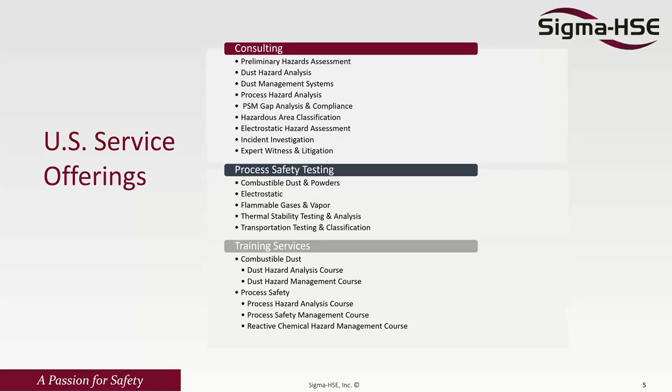I have over 24 years of experience in safety engineering, and process safety more precisely. That includes anything like DHAs, hazardous area classifications that we're going to be covering today. In addition to that, I have experience in facility siting, incident investigation, auditing, PHAs, etc.

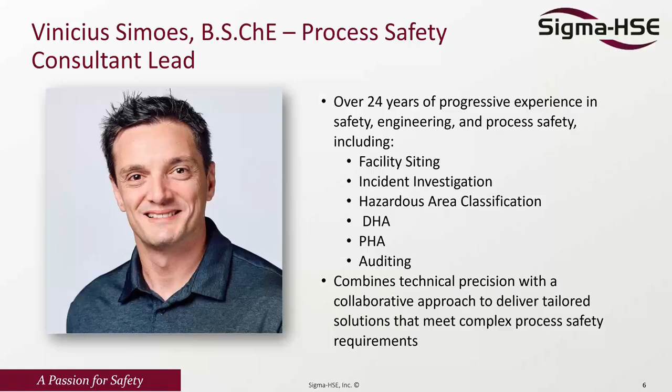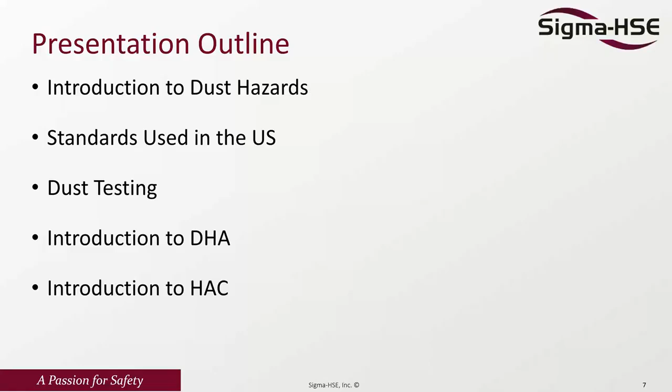The idea of today's webinar, as Mark highlighted, is an introduction to dust hazards: understanding what they are, why we need to address them, why we look after them, and try to mitigate what could be a potential issue, the standards that are normally used in the US. Then we're going to talk a lot about dust testing, DHA, and hazardous area classification, and highlight the importance of each one and why we're focusing on them. The industry has been trending to focus a lot more on this for the last several years.

A lot of this has to do with the incident data. If we look back from the mid-2010s to now, there's a significant decrease in the quantity and amount of fires and explosions, and resulting injuries and possibly fatalities over the course of the years. In the graph, you have the United States, Canada, and international data. A lot of this data isn't going to be precise, because many countries that didn't record this in the past have since started recording it, so the international data is a bit of a bigger mix.

The trend I want to highlight is basically the United States and Canada, because those have been recorded for a while now. This data gives us an average of 28 dust explosions per year, which leads to around 25 injuries and a range of 1 to 6 fatalities over the last several years, and that's consistent going back even 8-10 years.

We exclude dust fires from this, because a lot of times you just have the fire and that's it. So we focus more in terms of fires and explosions, flash fires and the explosion side of things, because those are usually the ones that have significant impact.

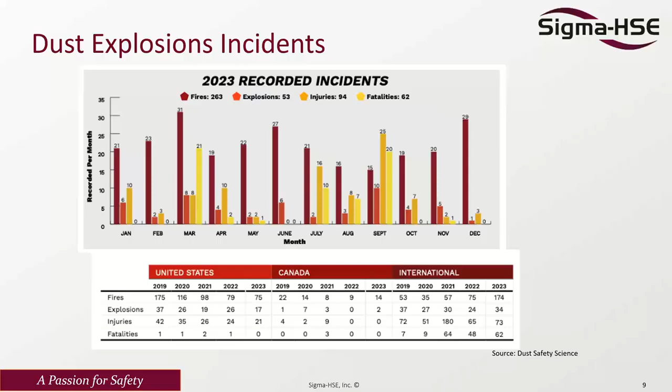Once we talk about fires, flash fires and explosions, there's a topic I want to touch on, which is what Mark was talking about, the pentagon, because it all starts with the triangle. If you think about it, I have an oxidant, I have an ignition source, and I have the fuel. With those three, that's what I need to generate a fire.

With that fire, great. It's localized. It's just looking into that specific area there.

Once we start tossing the conversation about dust clouds or vapor clouds, or anything like that, we're talking about a dispersion. So that cloud is not steady anymore, it moves and creates a little bit of an envelope. If we have ignition at that point, we have the oxidant, we have the fuel, we have the ignition source, and we have this dispersion, we're now talking about a fire, a flash fire, which is basically a cloud fire. So anyone in that area will be severely hurt, severely injured, and possibly a fatality. That's where the importance of good housekeeping comes in, which we'll talk about further down, because it minimizes those possibilities of dust clouds.

Once we toss an extra factor in there, which is confinement and congestion, then we're talking about a possible explosion. What generates an explosion is the cloud catches fire, and that cloud accelerates enough to generate an overpressure. The way this happens is by having congestion and confinement. Think about a simple example: if you put a little firecracker inside a box, the bang is much bigger. Why? Because it's congested, right? So that's the same idea. The more confinement you have, the more the flame accelerates, the more speed it generates, and the more you reach towards the maximum pressure that can be generated.

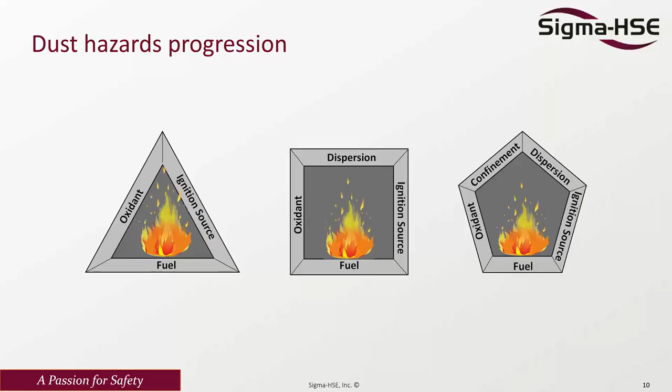The way we need to look at preventing those fires and explosions is basically by taking away one of the edges of the pentagon, the square, the box, or the triangle, however you think about it. For explosions, the simplest way is by taking away the confinement. If we take the confinement away, the explosion is gone, because I don't have enough to accelerate that flame and actually get it ignited.

The next one is to get rid of the flash fire. How do we do that? By taking the dispersion out of it. If I take the dispersion out, there is no flash fire. And how can I do that? As I mentioned, good housekeeping. Be sure your system does not let dust out. Be sure that whatever dust is there, I take care of it. I do good housekeeping so there's no dust settling that can generate a cloud.

And then last but not least, if I need to get rid of the fire, I need to get rid of either the fuel, the oxidant, or the ignition source. Let's be honest, getting rid of the fuel is almost impossible. The only way is if we replace the material we're working on, and there are some processes where we can't — it's just a single material we need and we're going to need it. For example, if we're making bread, we need the wheat. Needing the wheat, there's no way I can take the wheat out and do something different. So that's just one example.

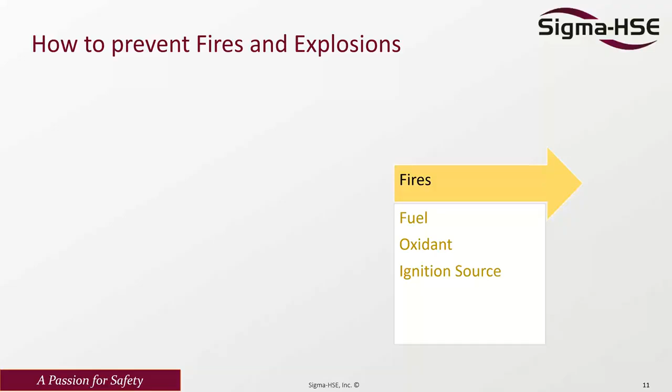So that's when we're talking about ignition sources, taking ignition sources out of the equation. Be sure we know what the conversation is going to be later on, which is the testing. Be sure what's the minimum ignition energy I need for that material, because with that I know my ignition source present cannot exceed that energy. So this is kind of what we're going to talk about in a little bit.

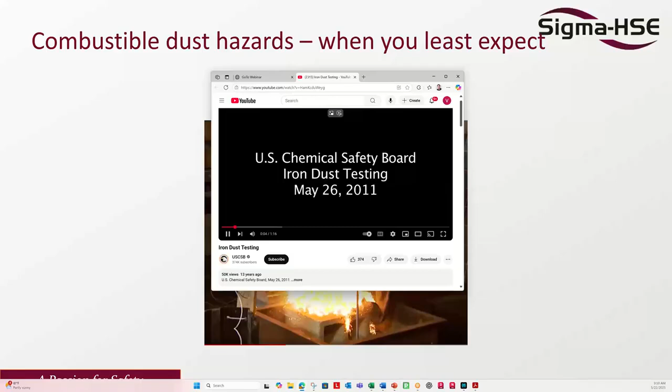One of the things, and why the test is expected, is that a lot of times we get ignition of things that we least expect. So the CSB has this video about iron — it's just an iron dust testing video. They release a little bit of iron dust and they have an ignition source, and you get to see what happens. The idea is to see it exactly, in real speed and in slow motion as well, both of them, and you're going to see how they catch.

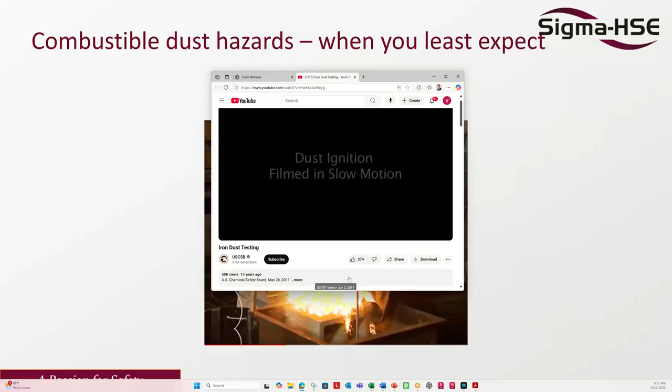And you can see in slow motion the little bit of particles that get ignited.

This is one of the things we're talking about as being extremely important for our testing, because we want to be sure that we understand what's the hazard associated with that chemical, dust, or particulate.

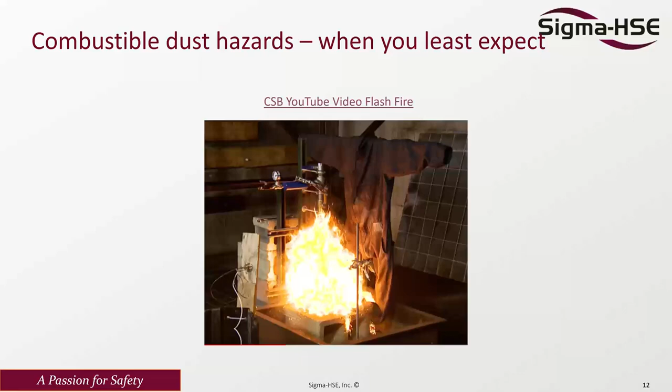So all great, we saw the fire, we saw this, and we can talk about explosions and so on. But there's one thing I want to highlight that we really need to take into account when we're talking about secondary dust explosions originated from a fire or a primary explosion.

This primary explosion basically disturbs the dust that is there. So if you have a dust layer in equipment and an explosion on nearby equipment, or even a venting panel releases, just that release can disturb the dust and create a secondary cloud. The secondary explosion is when we get ignition on this disturbed dust, and that tends to have a much more severe impact. That's the importance of understanding that.

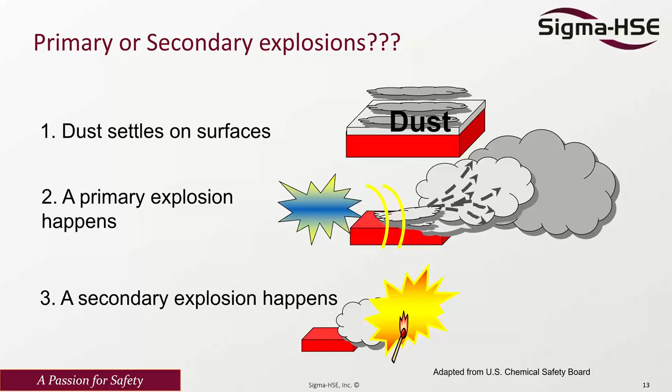So now I want to talk about what standards we use in the U.S., specifically in the industry to deal with combustible dust.

NFPA asks for 4 items, or assigns 4 responsibilities, for operators and owners. They talk about determining the combustibility and explosibility hazard of the material—that's where testing comes in. We identify and assess fire, flash fires, and explosion hazards—that's when dust hazard analysis comes into place, and it's now a requirement for OSHA that we carry those.

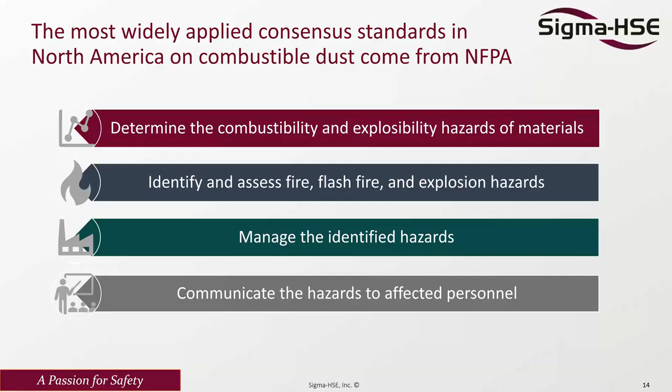Then we need to manage the identified hazards, understand what they are, and communicate them to the affected personnel. These are all responsibilities of operators and owners: identify whether the dust is combustible, manage the identified hazards, and communicate to personnel who can be affected. The commonly applied U.S. standards all come from NFPA.

There's NFPA 61 for agriculture and food, 484 for metals, 664 for wood, and some others. Some apply across the board, like NFPA 68 for explosion protection vent design, 499 for electrical area classification, which we'll talk about later, and 652 and 654. Those are common for everyone.

On top of that, NFPA came up with 660, which covers all materials. It's a replacement standard, and the intention is to eventually migrate all those individual standards into a single one. This will make your life a lot easier to determine what you need and which standards to follow, rather than trying to figure it out.

This is just a sample of some of the standards—there's a lot more from NFPA, and other standards from other industries, like the UK has its own standard for these. All of this depends on the country you're in, where you're doing the assessment, or even the client itself.

I myself did several of these over the Americas, basically because of client requirements, even though it's not required by our standards here or in South America. When I went to do this, it was still required because of the client. So it's not only regulation, but could be client compliance too.

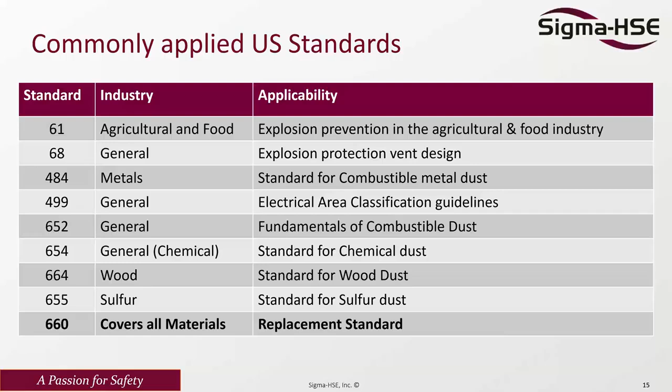So the first of the 4 items the operator needs to deal with is the combustible dust test. The reason why we do this is that we need to look into things.

There's a screening test based on UN recommendations for transport of dangerous goods, basically to know if the material is explosible or not. This is a go/no-go kind of test. ASTM has 2 standards for the screening, and our lab in the UK and India knows all those standards, applies them, and we do several testings for different clients.

So for combustible dust testing, we can take historical data, published data, or we can do the testing ourselves.

The major advantage of doing the testing is that you're specific to your material, rather than taking a generic rule or generic data. I'll give you an example of petroleum coke. Petroleum coke can have compositions that are not even combustible, to compositions that are combustible. Our lab tests a diverse range, some ignite, some don't, and it has a lot to do with the composition. This is the importance of why you test your own product, so you can ensure whether you are explosive or not in your situation.

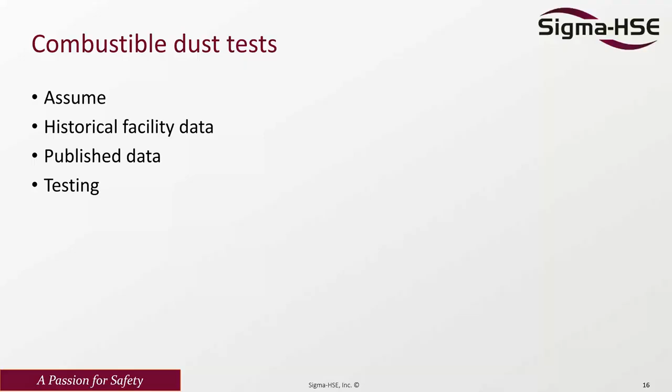There are several tests that we can conduct. The most important ones figure out the severity: the minimum explosive concentration, basically how much do I need to actually ignite a cloud. And explosion severity tells me the Pmax, the maximum pressure, and KST.

Then we have sensitivity to ignition, which tells me the minimum ignition energy - how much do I really need to ignite that. Then there's the minimum autoignition temperature for the cloud and for the layer. So think about this: if a layer of dust is settling in equipment, and that equipment is heated above that temperature, it's the autoignition temperature, meaning the material ignites.

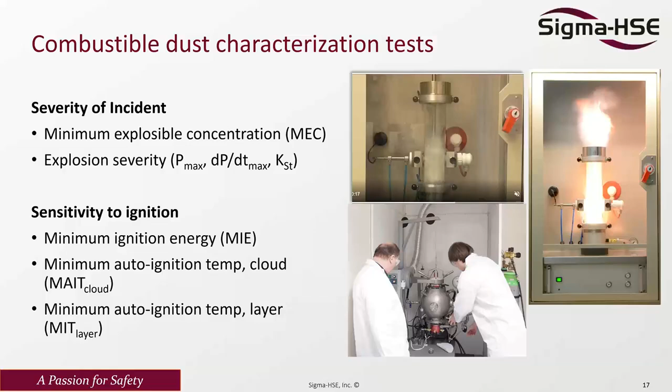The cloud is the same thing. If the cloud reaches an area like a furnace, even without direct flame, it could still ignite. The minimum ignition energy tells me, for example, for sparks, what that threshold is. So if the material is under the minimum ignition energy for something like brushing, it's okay for me to use that as part of my housekeeping. If it's not, then I need to take it away and use vacuum systems and so on. That's where we understand what our material is and what we can do in terms of determining the severity and the impact.

Next, I want to talk about the second item, which is identifying hazards. That's where the DHA, the dust hazard analysis, comes into place. Similar to what we talked about not too long ago in our webinar on PHAs, or process hazard analysis, the DHA uses a similar approach. You have several ways to do it, and we're going to talk about two of them here. One is risk-based, where you define your scenarios and risk rank them, and the other is a checklist. Those are the most common ways of doing DHAs.

One requirement by NFPA is that it's led by a qualified person, someone with experience, because the better the quality of your workshop, the better the quality of the assessment, the better your results, and the more aware you become. That's the reason for requiring a qualified person.

It's based on the combustible dust characteristics of the material we're discussing. We evaluate the hazards and scenarios and provide recommendations on what can be improved in your system, because often we define our scenarios, define all our safeguards, look into mitigations, and the risk is still not acceptable. In that case, we need to provide recommendations to reach an acceptable level - it could be as simple as increasing ventilation in an area.

So if dust is present, it's not going to be enough in terms of volume to generate a concern for me. These are the kinds of things we talk about. Of course, all of this is documented into either a spreadsheet or a report that can be reassessed.

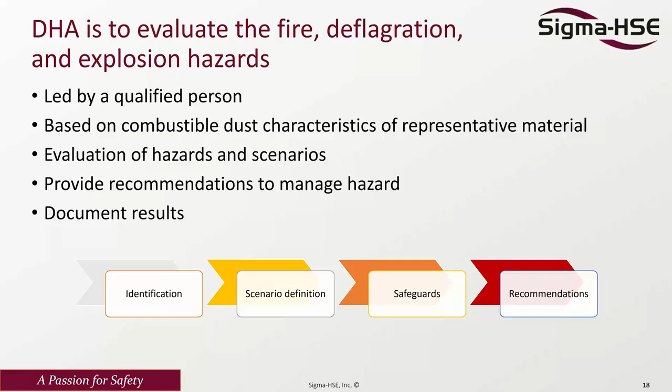What needs to be evaluated, in terms of equipment, is every piece of equipment in the process that handles combustible dust - we need to look at fire and deflagration, basically explosions, and each building space that contains combustible dust. We need to look into storage, the final product, and the process. All of this is covered as part of the DHA - we need to go and assess every single one of them.

And for the buildings, we're going to look into dust migration, deflagration propagation, the fire hazard, the deflagration hazard, and of course look into housekeeping against accumulation. So all of this is part of a DHA.

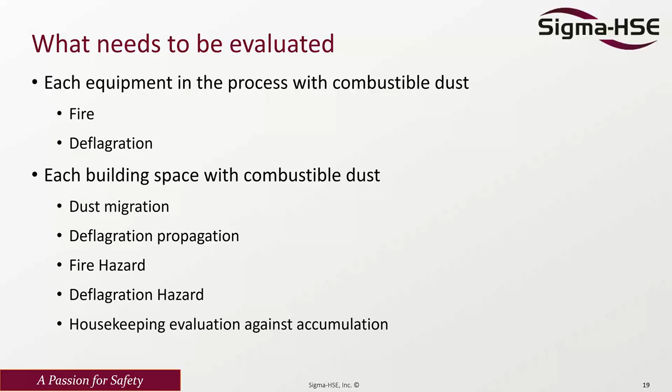That's where the challenge becomes a lot of times to do a DHA or a desktop DHA, is because you can get the housekeeping process, you can get your procedure for housekeeping, but not necessarily does it mean that this is going to be implemented when it comes in. So that's where it becomes a little bit more of a challenge to do those over the desk assessments.

So one of the things that we look at, as I mentioned, is we need to assess the hazards in buildings as part of DHAs. Very simple: the material, that equipment has combustible dust, we need to look into that. We need to look into evaluation, what scenarios can come from that. But when it comes to buildings, is where we need to look.

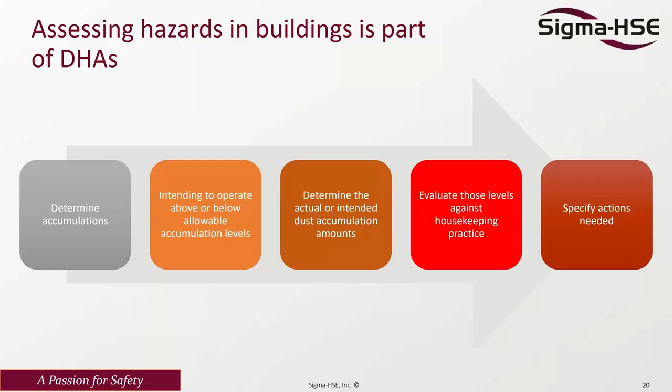Let's determine accumulations. Do we have the intent to operate this above or below the accumulation levels that are accepted? We need to determine the actual or intended dust accumulation amounts, and then we evaluate those against housekeeping practice, and then we can specify actions if needed. This is the initial part of DHA, determining every single thing, just postulating the scenarios, what can happen.

Now we look into ignition sources. What ignition sources do I need to consider? Do I need to consider hot work? Do I have permits for doing hot work? Trucks, hot surfaces, open flames like an oven, fuel fired equipment, heated equipment.

Because if you think about it, we even talk about some of those as part of the testing. If it goes above a certain temperature, and that's the auto ignition temperature for the cloud, I don't really need a flame per se. Above their auto ignition, that material can catch fire.

Then we're talking about electrical, impact sparks, frictional sparks, electrostatic discharge. There's different things that we need to consider.

One of the assessments that we do at Sigma as well is electrostatic hazard assessments, where we come in and we measure your electrostatic properties. We have cases where you think your shoes are spark proof, and then when we test it, we figure out that no, you can actually conduct enough that will actually create an ignition source.

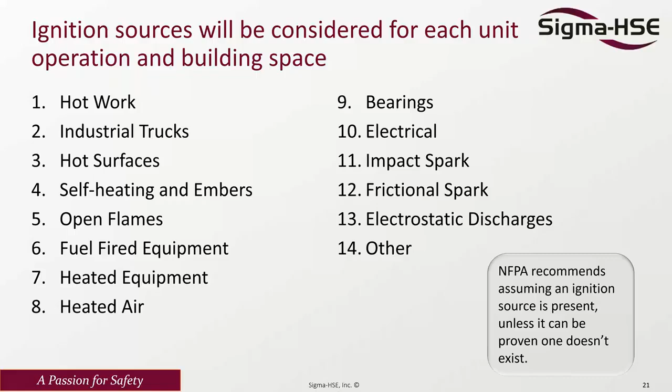So all of this is ways that the industry has been evolving to actually prevent dangerous things from occurring. NFPA itself has an energy scale for regular activities: corona, brush discharge, bulking discharge, and then sparks, and then you look into that against the minimum ignition energy for the material.

So we're talking about this, we're talking about ignition, we're talking about postulating the accidents. Now we get to the part of doing the assessment. How are we going to do this assessment? The way I'll cover is two ways, basically.

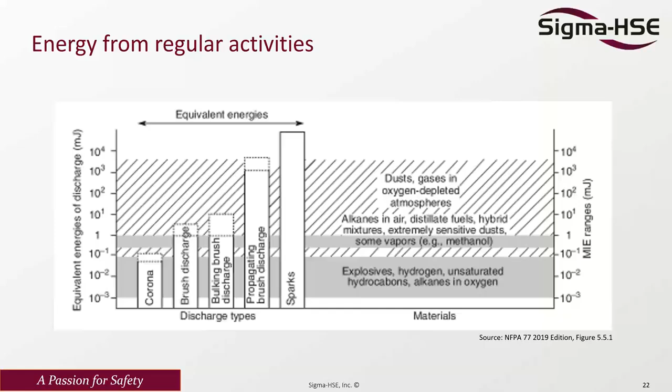The first one is basically a risk-based approach, where we're going to employ a risk ranking matrix to prioritize the implementation. It can be a matrix that's 4x4, 5x5 - I saw a matrix 8x8. The more layers you have on this matrix, the more complicated it becomes to define, okay, is that an A or is that a B? Is that a D or is that an E? So the most notorious accepted reasonable size matrix is a 5x5.

So it becomes a little bit easier for me to say, yeah, no, this is not going to happen. I have seen matrices that say it happens once in the industry, once in the life of our company, once in the life of the facility - all of this gives you the ability to do it. So in a nutshell, what we try to do here is rank risk. Let's say if I have a release from this conveyor belt, what is the likelihood that it will occur?

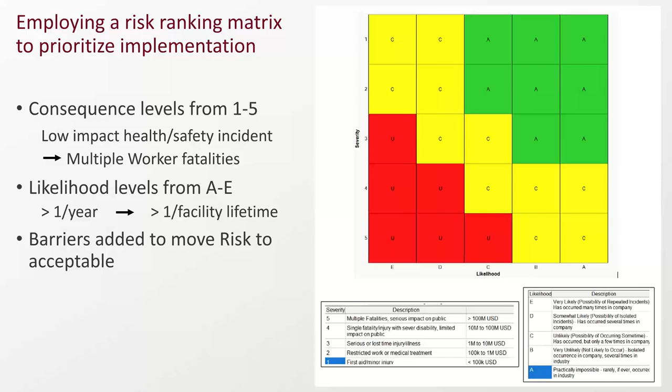The other option that I mentioned is checklists, which allow for easy evaluation of ignition sources. It's simple to prepare using well-defined codes and standards. We have one that used to use the old standards, and we already have one that is using 660, for example. So if you want to do the assessment on 660, we can use that checklist. Or if you want to do the old standard 652, 654, it's all in there too.

And then we look at the answer, the cause, the consequence, we risk it, we risk rank it, and then we provide recommendations. So that's basically how it goes. So we're going to provide you with valid information in terms of what can be done to prevent that, right?

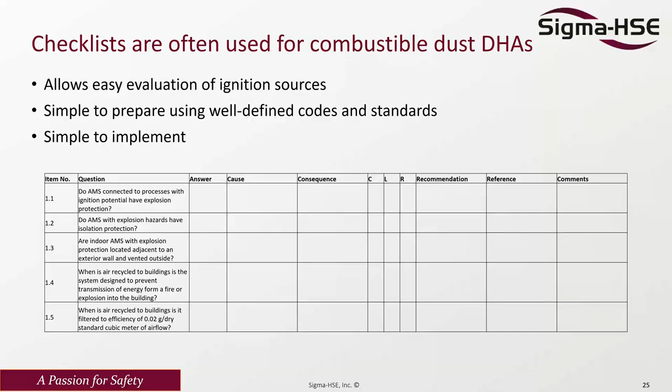So this is the two that we have. The problem that we have a lot of times is that NFPA is going to rely on us to determine where the explosion hazard deflagration exists. So that's where it goes back to needing someone with experience to do it. And it's not only the lead person, but also the team that is going to be doing it. So we can determine every single possible scenario that can occur, and we look into them.

In terms of deflagration, we look at the particle size to deflagrate. Is that suspended in the air? Is it sufficiently high concentration to deflagrate? Do we have enough ignition, is the ignition source strong enough to ignite that? And then the explosion is all of the above, in a compartment or container or along a whole bunch of pieces of equipment, right?

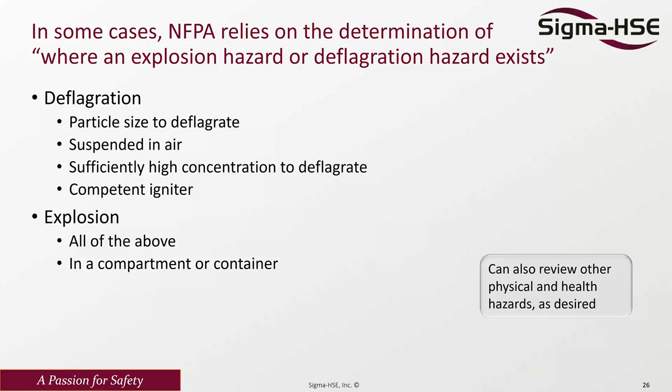So as I mentioned, this is one of the things that we do. And again, we look into physical and health hazards for all of those. And then one of the things is, we're talking about the importance of housekeeping because we avoid the dust accumulation. We design for dust containment, right?

But let's be honest, dust comes out. Dust collection can be included, but every now and then we're still going to have material outside. So the predictive maintenance prevents those leaks, but we need to take care of the housekeeping where needed to avoid a secondary explosion.

So the secondary explosion, as we talked before, is when we start the initial blast wave. It doesn't even need to be a blast. As I mentioned, it could be just a venting panel releasing pressure because there was an increase of pressure inside the system, and before an explosion occurs, it does use that vent panel. And from that vent panel, we can disturb the dust that is accumulated, and that can be ignited, and a secondary explosion can happen, which is worse in that case.

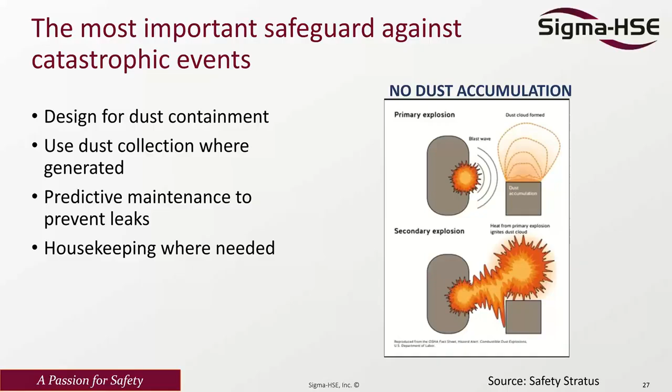So a successful prevention, a successful DHA, doesn't stop right at that first step. We're talking about determining the combustibility and explosibility hazards of the materials. This is required by NFPA, that you need to evaluate and test your dust. We are going to identify and assess the fire, flash fires, and explosion hazards. We're going to manage those hazards, and we're going to communicate those hazards to affected personnel.

This is a cycle that needs to come back, because that person that can be affected is also a catalyst to come back and say, hey, I know we're not supposed to have this, but it's coming around, it's having accumulation of dust over there. So it's a continuous process to try to implement this.

A DHA, to be successful, should include a management of change process in the end, so that any major changes trigger a redo of the DHA. Or every 5 years, you're supposed to redo your DHA. It's similar to what we talked about with PHAs, and management of change can help you with that.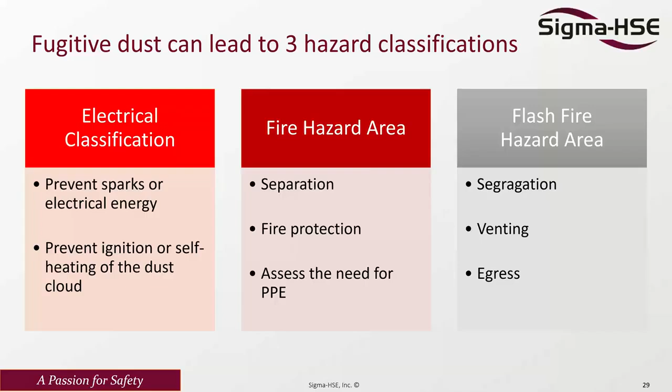So when we talk about area classification or hazard classification, one of the things that comes into light as well is area classification. Dust accumulation impacts the area's electrical classification. So I need to be mindful that once there's a possibility of dust getting out, or having dust present, I need to determine what kind of protection systems I need.

Do I need ATEX equipment? Do I need explosion-proof equipment? What is needed from me to actually keep that operation and the process safe?

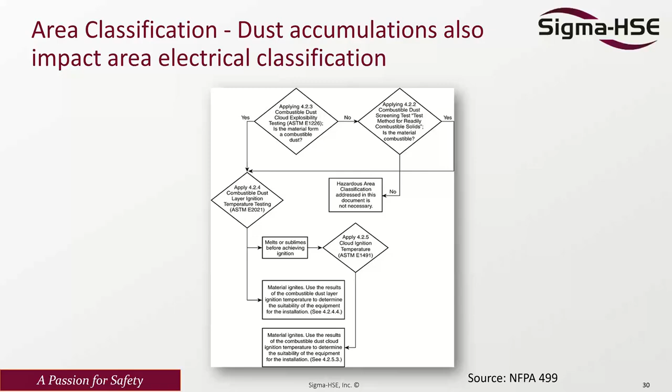NFPA 499 says that you should test your dust for a go, no-go explosion determination. If it is a go for explosion, then you need to do the area classification. If it's a no-go, we can skip that, because here are the results from my material, here's the final report. If it is a go, then we need to apply that.

NFPA has 3 different area classifications or classes. Class 1 is flammable gas or vapors. Class 2 is combustible dust, and class 3 is combustible fibers or flyings.

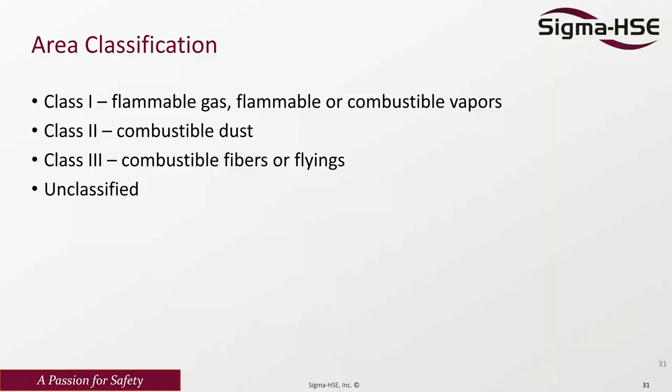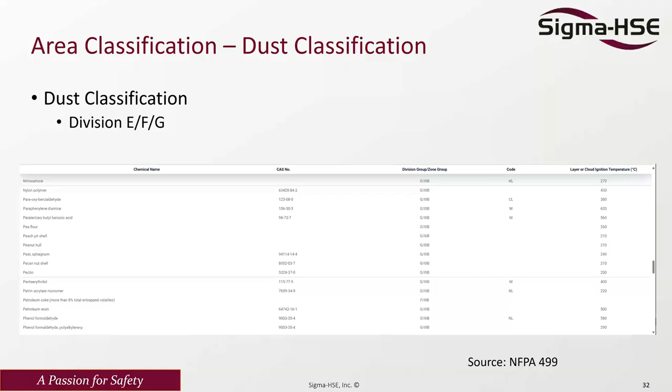Why do we use this? The first reason is the layer or cloud ignition temperature, so we know what kind of ignition temperature we're going to need. For the area classification, the dust type tells me which diagram to use to do the electrical classification.

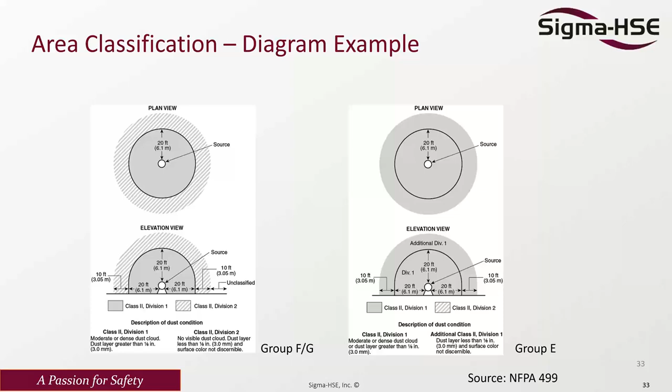Things that allow us, that's where it becomes valid after implementation - even if you do an electrical area classification as part of the design, after it's implemented and there's a little bit of operation, it's good to come back and assess it. You may have said we don't have accumulation in this area, but after inspecting the plant, there's actually dust a little bit over 1/8 of an inch, or a bit bigger than 3 millimeters. Then this area that was technically unclassified needs to be classified now. All of this needs to be taken into account when doing your area classification.

Some of the advantages that we at Sigma can present in this area: we have comprehensive support across all stages. We have experience doing every single DHA and hazardous area classification, from concept design all the way to facilities that have been operated for years and decades. We have proven expertise in DHA, and our consultants have over 30 years of expertise in this area.

Our approach blends standard with advanced techniques to allow for more realistic results. We try to recommend things that are reasonable, not something that tells you that you need to retrofit this equipment, building, or room. We try to do cost-effective solutions, balancing things and making everything reasonable for you.

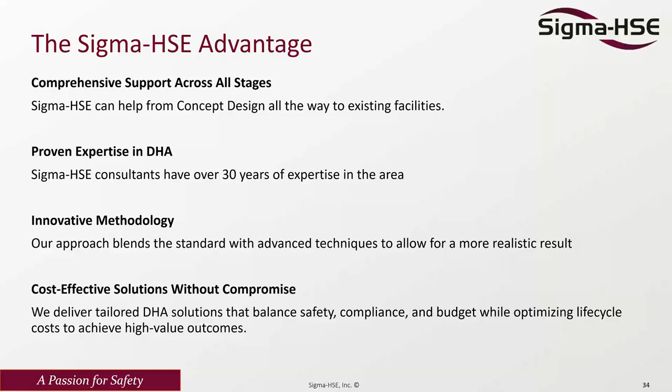Is everyone required to do a DHA, or how do I know I need to do one? You're required to do a DHA to determine that—again, you can do the testing, and if your testing says this material is not explosive or not flammable, then you can simply put a note saying there's the testing, it's not needed for that reason. If you have combustible dust, it is required by OSHA, at least in the US, that you carry a DHA.

Yeah, and actually OSHA will use the general duty clause to point towards NFPA. So I guess one other note is if you have explosible or combustible dust in the facility, then the DHA is required. But like Vinny said, get the testing done and you'll be all set.

The first step, a lot of people come to us and say, hey, I want to use generic data. I'm like, look, the go/no-go for your dust is a very simple, very cheap test. You're talking about, what, Mark, $500 to $1,000 to do a go/no-go. So in all honesty, why not test it and be sure that you are okay or not? Because guess what, you can save yourself a lot of money just by testing that and saying, hey, we're not explosive. Can you write something up with this test results? I'm like, yep.